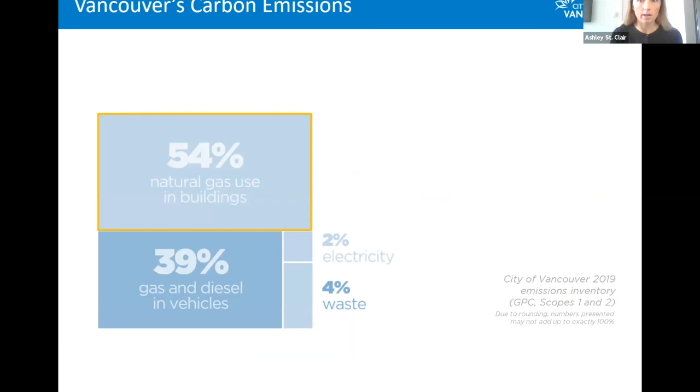So jumping into the NEU and I guess a bit of the origin story. So we're in Southeast False Creek and expanded to the False Creek area generally. But the Southeast False Creek area was initially a brownfield site, 80 acres historically used for industrial purposes. And in 2006, council approved a development plan that saw 6 million square feet of new development built out in that area, and that build out is nearly complete today.

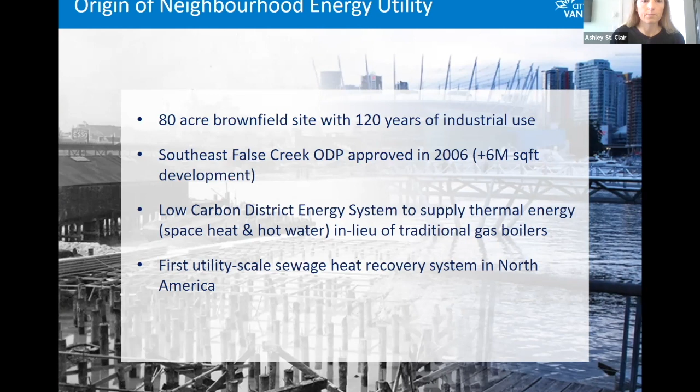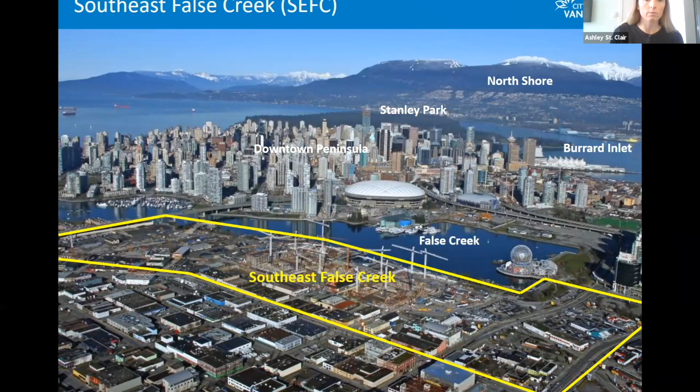So the utility became operational in 2010, just in advance of the Olympics. And we are owned and operated by the city, but we are financially self-sustaining. So that means that all of the costs are recovered through our rates. And we have seen significant growth since 2010. And we've actually expanded our boundaries a handful of times, to expand along Great Northern Way out towards Emily Carr and also into Mount Pleasant and Northeast False Creek.

We now have 43 buildings connected, and we deliver 70% renewable energy. That's primarily through a mix of waste heat recovery from sewage, as well as renewable natural gas. And as I mentioned, we have a commitment to develop a roadmap to 100% renewable energy by 2030.

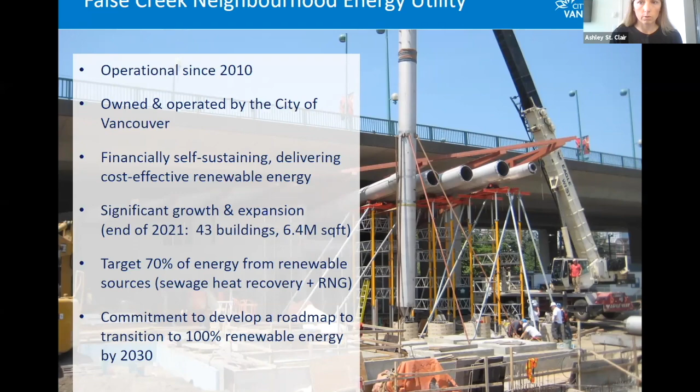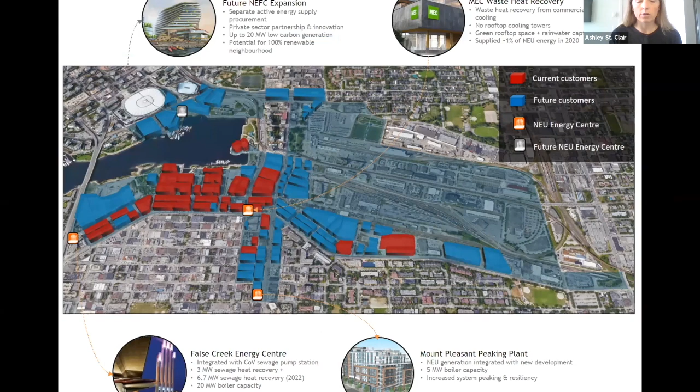At this point, I will hand it off to Derek to get into more of the operational pieces. And Derek, I don't know if you want to take the screen there.

You're on mute, Derek. Yeah, sorry. Okay. Technical. 2 years into the pandemic and I'm still struggling here, but no, thanks Ashley for all

that good background content. This map will hopefully help orient people. It's a map of the NEU service area. And so what's being shown here is the polygons in red. Those are buildings that are currently connected to the system and are being serviced by the system. So they'd be getting all of their energy for heat and hot water from the NEU. And then in blue there, those are buildings that we plan to service as they redevelop.

And so as Ashley was mentioning, the goal of the NEU originally was mainly around the Olympic Village in Southeast False Creek here. We've since expanded out east. Out here is Emily Carr University that's connected, and we'll pick up all of the development along the way there. We started expanding into Mount Pleasant, where there's going to be lots of residential and commercial redevelopment. We've got Science World connected here, and we're looking at an extension to Northeast False Creek in the north here.

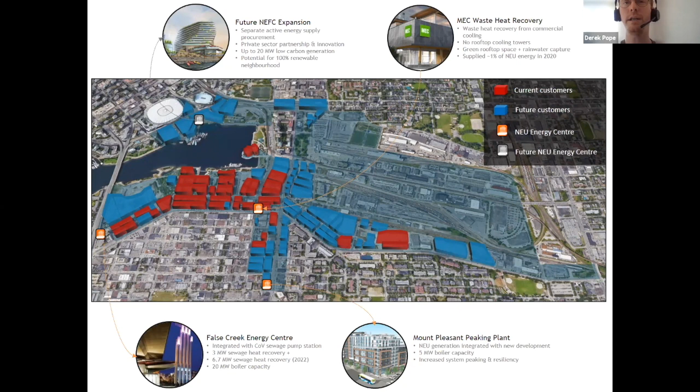And we've also got currently a procurement out in Northeast False Creek. It's a call for low carbon thermal energy. And so we intend to build a distribution grid, but we're seeking energy suppliers that could plug into that node up there, which will one day ultimately interconnect with the rest of the system. So that's kind of the lay of the land currently. We're up to 43 buildings connected, and lots of growth ahead of us as this map shows.

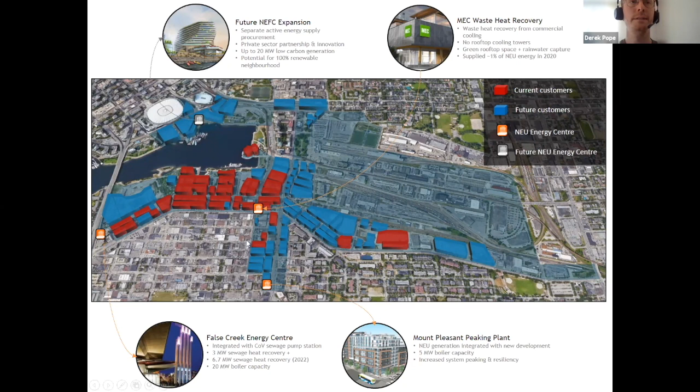We take some of that sewage into our plant and we extract thermal energy out of it using a heat pump. And we take that thermal energy and put it into our hot water distribution network. On particularly cold days, we can also use our gas boilers. And so water leaving the False Creek Energy Center is supplied between 65 to 95 degrees Celsius, depending on how cold it is outside. And that hot water then travels through buried distribution piping to the buildings.

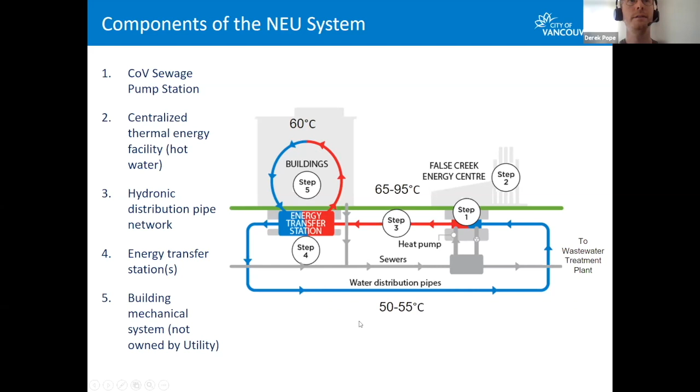This is what the distribution network looks like. So it's a two-pipe system, a supply and a return, buried pipes made of steel, pre-insulated, and they run along the roadways and then branch off and tie into each one of the buildings. And they're designed to operate at up to 95 degrees Celsius and 1,000 kilopascals of pressure.

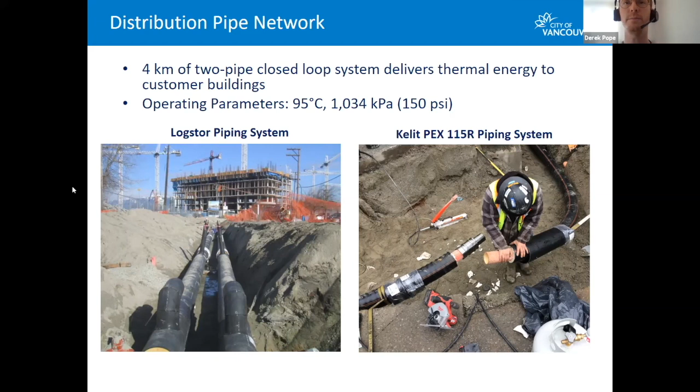This is what the energy transfer station looks like. And so basically a heat exchanger for the building's heating loop, a heat exchanger for the building's domestic hot water loop. And so our hot water goes in one side of the heat exchanger, the building's cool water goes in the other side of the heat exchanger, and there's a transfer of thermal energy within those boxes. The building gets hot water, we get cool water back.

And so we have one of these installed in each of the 42 buildings connected to our system. We can monitor them remotely and ensure that there's reliable service taking place.

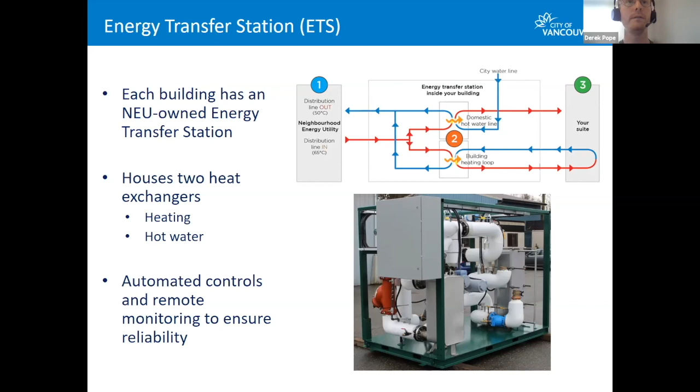This graph here is meant to give you an idea of the system temperatures that we'd require from any sort of energy generation project. So I've kind of alluded to them already, but basically our philosophy is to try and operate at as low a temperature as we can. But as demand picks up on the system, you have two ways of meeting it. You can pump more water faster, or you can increase the temperature of your energy supply to move more energy that way.

And so what this graph is showing here is the temperature of our system water and the outside air temperature. And so as it's warm out, we supply at 65 degrees Celsius, and this is for a good majority of the year. But as it starts getting below 10 degrees Celsius, then we fairly rapidly start increasing the supply temperature, because that's, of course, when we start seeing a big significant increase in the demand on the system as the heating demand goes up.

And this allows us to deliver 50 degrees Celsius to the building's heating system and up to 70 degrees Celsius to the building's heating system on the coldest days of the year. For domestic hot water, we need to be delivering 60 degrees Celsius, which is why we can never supply less than 65 C.

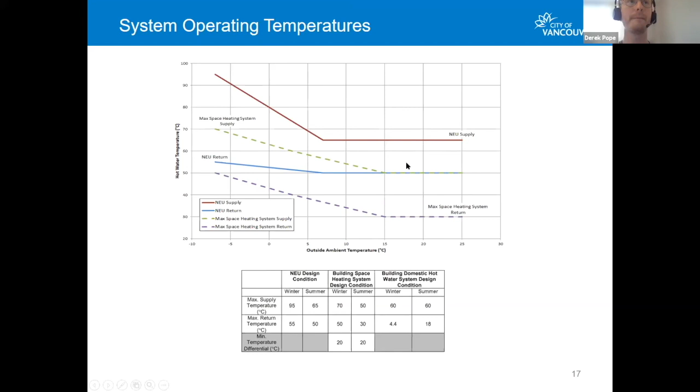And then some of the challenges that we face, these graphs should help to illustrate it, but it really revolves around dealing with the peak demands of the system. So what this top graph here is showing is the forecasted demand on the system by year 2035. This is showing in kilowatts, and this is the different months of the year. What should really stand out is there's much higher demand on the system in the winter months compared to the summer months.

So we need to have energy generation that we can deploy during those winter months. The other thing that should stand out is there's quite a big variation daily as well, and that's driven by domestic hot water peaks. First thing in the morning, everyone wakes up around the same time and starts having showers and things like that. So we see a pretty dramatic spike in the demand on the system first thing in the morning and just as everyone's arriving home for the day. So that will be a big challenge for us.

This graph down here is a load duration curve. So it shows the number of hours that the system's at various capacities or various loads. And it should give you an illustration of this challenge as well. So right now, and this is real data from 2019, we have 3 megawatts of sewer heat recovery. And so that can run pretty much flat out and occupy a pretty large piece of the annual energy demand. But what you find is for less than 1,000 hours of the year, our loads are pretty big. And so the challenge there is economically meeting those loads using renewable energy.

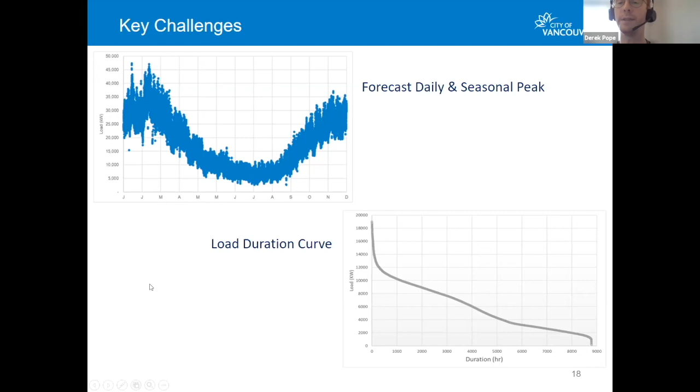Generally, we like to select renewable components that we can baseload, get really good utilization out of them, and run them fairly continuously. Where the economics become more challenging is deploying renewable energy sources that can be turned on and off just when they're needed during those peak periods, be it seasonal or daily peaks. So that's one thing that we'll be grappling with as we try and transition to 100% renewable energy.

This graph shows our forecast energy demand over time and how we expect to meet that demand. And so this y-axis is in gigawatt hours. So in 2021, this year, we'll see about 60 gigawatt hours, 60,000 megawatt hours of energy demand on the system. We'll meet that using our existing sewage heat recovery system. We'll also use some renewable natural gas. That'll get us up to our 70% renewable energy target. And then the remainder will come from conventional natural gas.

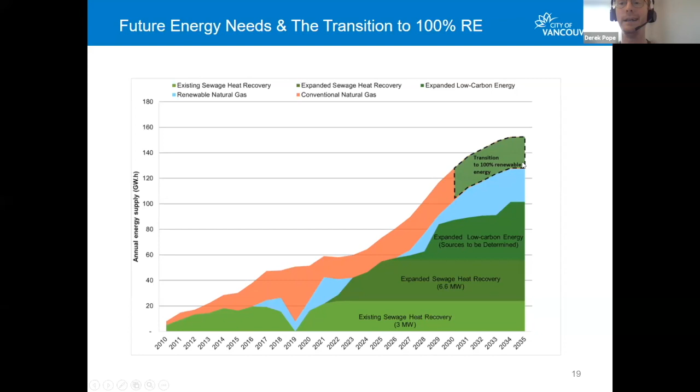The other big thing is that in year 2030, we want to completely remove ourselves from natural gas. And so what we had been previously using natural gas for, peaking and backup, we want to transition that component to something that's fully renewable. All right, I'm going to pass it back to Ashley for a couple more slides to take us home here, and then we'll open it up for questions.

Hey, thanks, Derek. Yeah, so we've been able to lay out what the NEU is, our operations, and some of our challenges, and just wanted to loop back to the core challenge that we have in Project Greenlight, helping us transition to 100% renewable energy by 2030, and maybe talk about what types of solutions we're looking for. So it is a very open question. We're open to a diverse array of solutions. Baseline, they should be compatible with our operating conditions, but the solution doesn't necessarily need to be holistic in that it doesn't need to solve the whole problem.

There will very likely be more than one solution, more than one tool, or more than one phase of implementation, especially as you've seen our growth pattern over the coming decade plus. So we'll need a whole toolkit to get us to that 100% target. And with respect to technology, we see solutions manifesting in different ways. As Derek emphasized, we obviously need to bring on additional low carbon supply, but there are big gains to be had through operational efficiency measures. For example, it will be really important for us to manage or shave our peak demand, potentially through storage of some form.